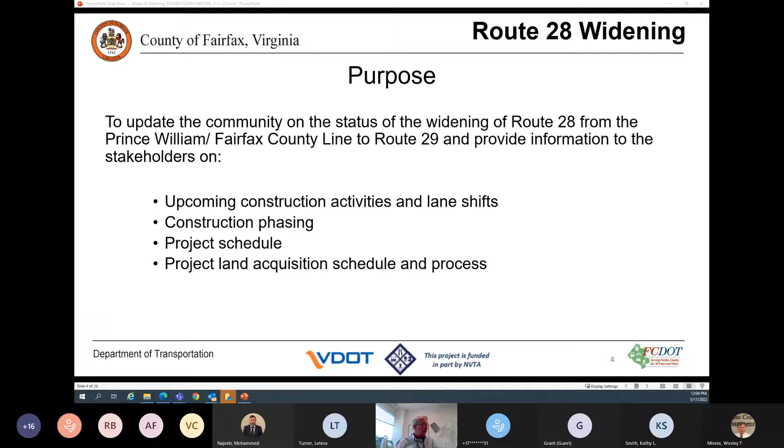Project overview, I think everyone's familiar with this. Our total project budget is almost $79 million, which includes design, right-of-way, construction, and inspection. We're building an additional through lane and a shared use path in both directions from just north of the Bull Run Bridge to the Route 29 interchange. We're also going to reconstruct the southbound 28 roadway at the substandard vertical curves just south of New Braddock and between Compton and Bradenton to meet current standards and provide greater visibility.

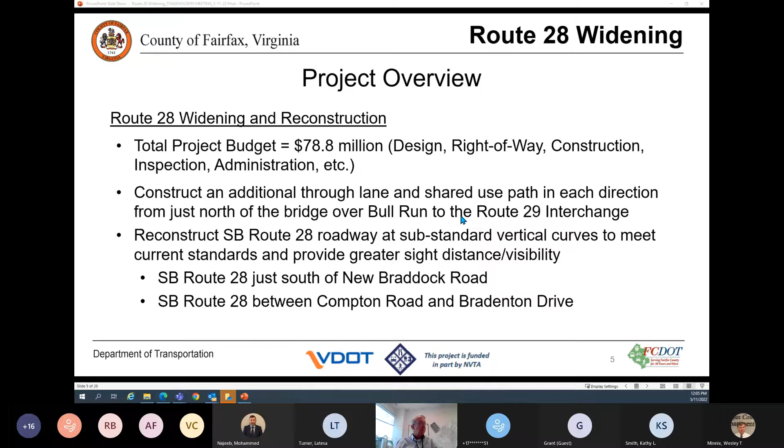Can everybody still hear me okay? Yes, yes, it looks like I'm being highlighted as talking, so that's a good sign. So yeah, just a quick overview. Once again, I'm Tripper Henson with Shirley. I know you guys can't see me. We'll do our best to work through the technical difficulties. I am the design build project manager on the project.

Some of you may have heard this before in previous discussions, but just a bit more overview of the project. Primarily, we've been working on the southern limits of the job, but there is quite a bit more work to go over the next year and a half or so of the project schedule. Basic limits are the county line up to the 29 intersection, just before the 29 intersection, as Jim alluded to.

We'll be building bike trails on both sides, northbound and southbound, as well as new signalized intersections at each of the 5 intersections along the corridor. All 5 that are signalized today will be upgraded with new signals and other pedestrian equipment associated with that.

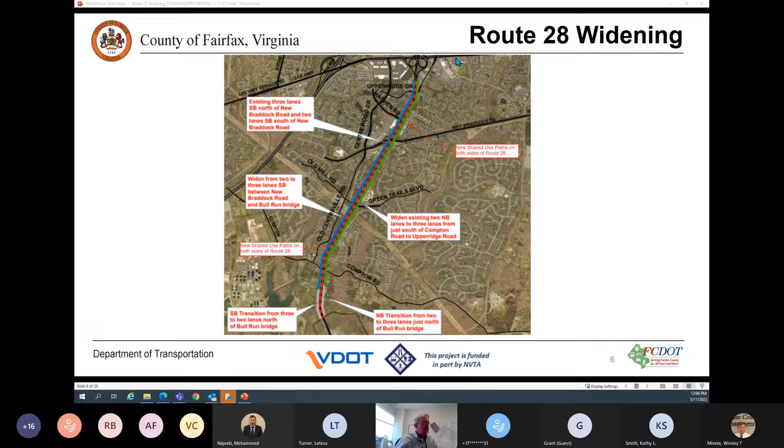The next slide has the summary of the 4 noise barriers, which are constructed as part of this project. I know we've had a couple of separate meetings that really concentrated on the discussions with these barriers, but just as a reminder, or if anyone on the call today wasn't part of those meetings, these are the 4 locations.

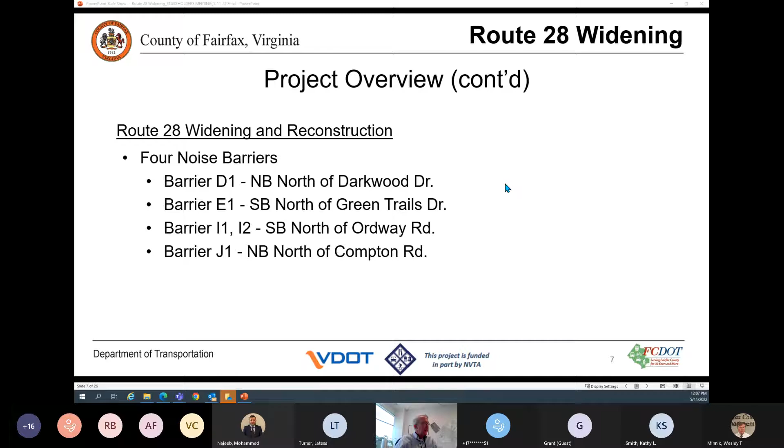We have them ordered by generic wall numbers just to be alphanumeric, but D1, north of Darkwood Drive, is the next slide—basically 28 northbound on the right side. Darkwood Drive is down there on the left of the screen, just to give everybody some orientation. That wall will be constructed.

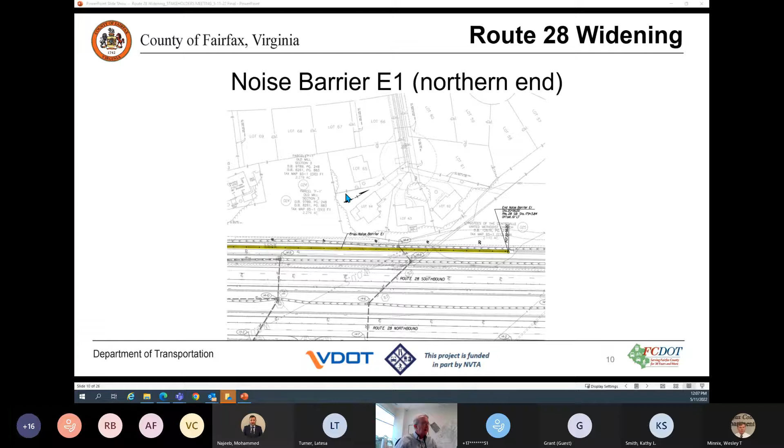The next wall, E—the schematic here is too big to fit on one slide—but southbound, just north of the Green Trails intersection, basically across the street from the Darkwood wall we just showed. That is the front side of the Old Mill community.

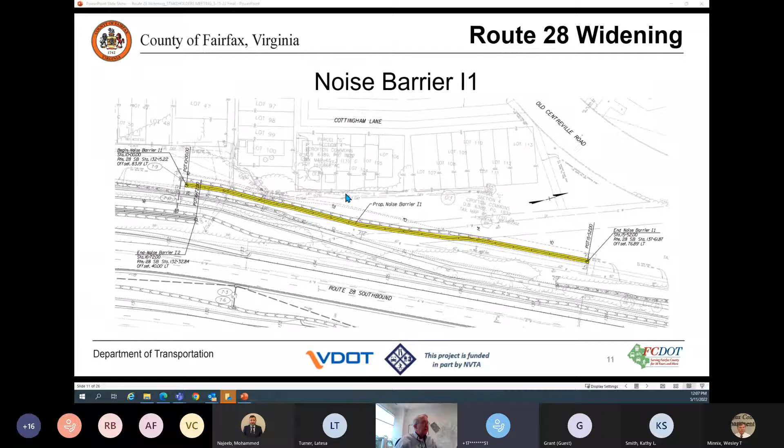The next wall, I-1, is actually a 2-piece wall. There's I-1 and I-2 down at just north of Ordway Road. This is the Crofton Commons neighborhood behind it. There's a gap in the wall that the trail will cut through, and that's why the walls are actually 2 separate structures, but really 1 noise barrier.

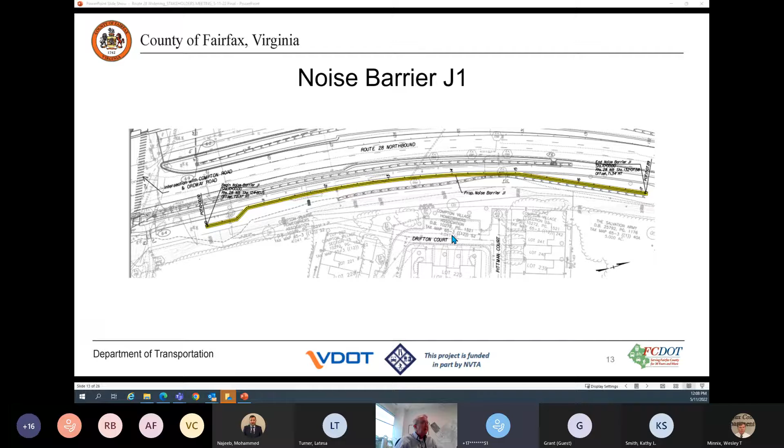And then lastly, northbound right side, just north of Compton—this is wall J1, so Compton is right on the left-hand side, right off the screen. We'll talk a little bit more about schedule here in a bit, but those elements will be constructed later in the project once design is finalized.

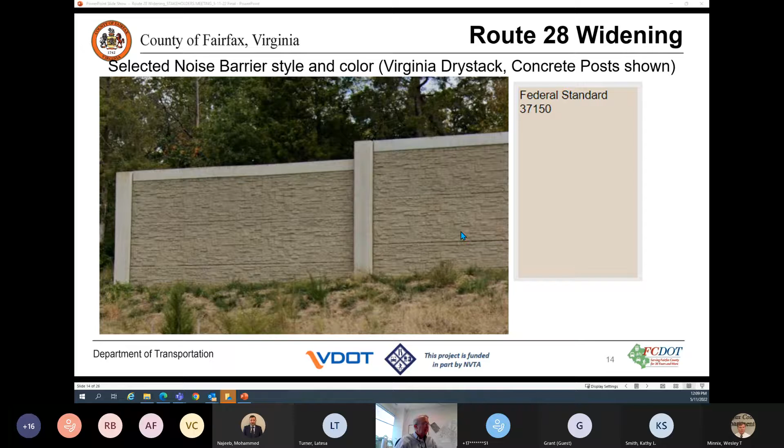So that's just a quick synopsis of what the wall will look like. Now a little bit about schedule.

This being a design-build project, we've been under contract working with the county, VDOT, and our designer Dewberry for quite a while now, working through design and moving into the construction phase. Those items in red are completed—real dates as we've gone through the process of getting design finalized.

A lot of folks probably remember we got out there early and did some advanced temporary work that completed early spring of 2021. That was to facilitate the room to shift traffic to build the permanent work we're working through now.

Roadway plans were finalized last fall, early winter, and then we rolled into right-of-way acquisitions, which have also recently been finalized. But as we're trying to get the job built, we're also managing design along the way, so we've had a lot of moving parts and continue to try to get to the finish line as quick as possible.

Permanent roadway widening is certainly underway—it's been underway for quite a while. Those folks driving through the job or familiar with it see all the work getting completed. That will continue through the project duration.

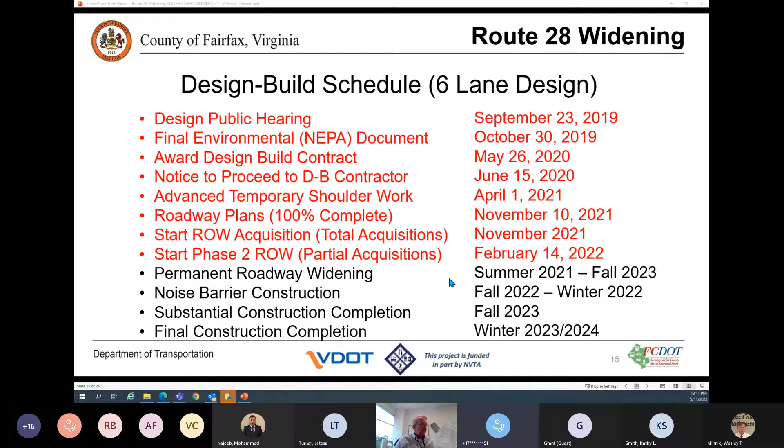Substantial completion next fall, with all the roadway elements opened up, is the current schedule, and final completion thereafter—finishing up grading, tying in some areas, and getting final pavement markings done, that sort of thing. So that's the real big picture look ahead. Now trying to dive down into a little bit of the specifics of what you'll see in the next few months.

Obviously, the primary areas of the job we've been concentrating on are the southern limits. A lot of that was based on limited right-of-way impacts as well as limited utility impacts, so we prioritized the areas available for work first.

We will continue working storm drain, storm structures, as well as the stormwater management ponds. A lot of folks have probably seen the clearing occur for the ponds. There are 3 ponds on the job that are above-ground facilities.

Excavation and paving will continue along Route 28. The bulk of the job, of course, is along 28, with side streets tying in and being improved also, but we're going to concentrate on trying to get 28 completed and opened up to help the commuting traffic. Temporary barrier placement—we've placed almost all of the first phase worth of temporary barrier from New Braddock to the south.

There is a little bit more barrier in the median, both on the northbound and southbound directions north of New Braddock. That will happen later this summer to open up some more work areas for the widening activities and storm drain to occur. Permanent traffic signal construction is well underway.

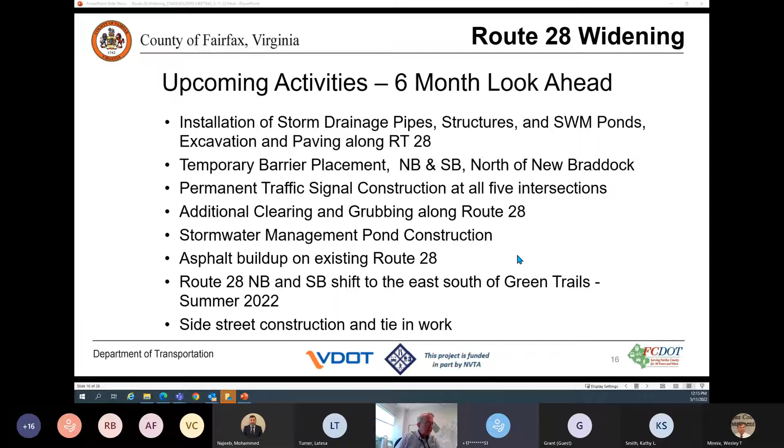We'll, of course, provide some updates on the county website and give everybody advance notice of that work upcoming. And as we finish these intersections and tie everything in, we will see some more activity on the side streets, tying in and facilitating new turn lanes and widened turn lanes and that sort of thing to more freely move traffic along 28. I know that's a lot, but just kind of an upfront look ahead of what we'll see coming up.

This is a graphic just kind of showing how traffic is being managed throughout the construction phase. Stage 1B off on the left is the current phase that we are working in. Area 1 is Old Mill to the southern limits of the project, so the Prince William County line. As I mentioned too, this is really the majority of the work that's occurred to date. Northbound lanes are on the right-hand side of the screen, so barrier set, protecting both the traveling public and the workers as the work area occurs to the right of the screen.

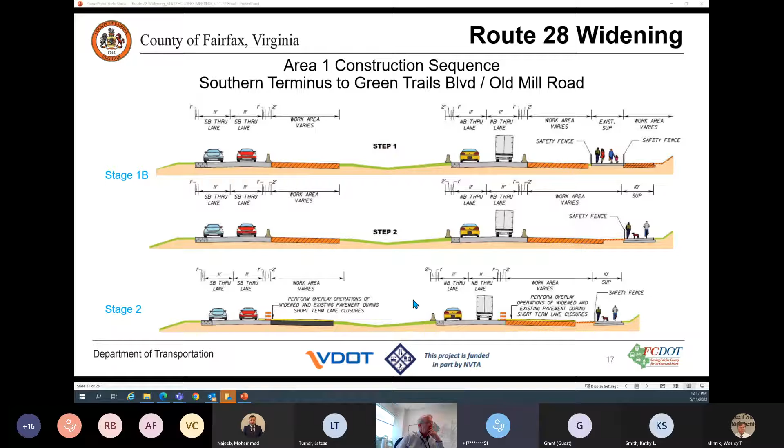Similarly on the southbound side, work is occurring in the future median widening activities for that third lane of 28 southbound. As we complete areas, the barrier will be pulled and relocated, and barrels will be placed to allow for buildup of the existing lanes under lane closures to tie in the asphalt and fix those grade issues that I mentioned. And then we'll shift traffic onto the section that is in orange and widen to the opposite direction. So just kind of a higher level view of where we're at.

Area 2, which we refer to as Green Trails, runs Old Mill to the northern limits of the job. The first phase work includes work in the median. Of course, we're concurrently building the stormwater management structures to the outside, which is a lot of the work area as well, but the roadway widening activities in the first phase are to the median. So that new barrier that will be placed north of New Braddock is to protect the northbound left and southbound left median widening on the northern limits of the job.

Similarly, we have some asphalt buildup once we finish those widening areas that will occur behind barrels, under lane closures, and off-peak hours. So once again, I know that was a lot of information, but a very high level summary of where we're at and where we're moving.

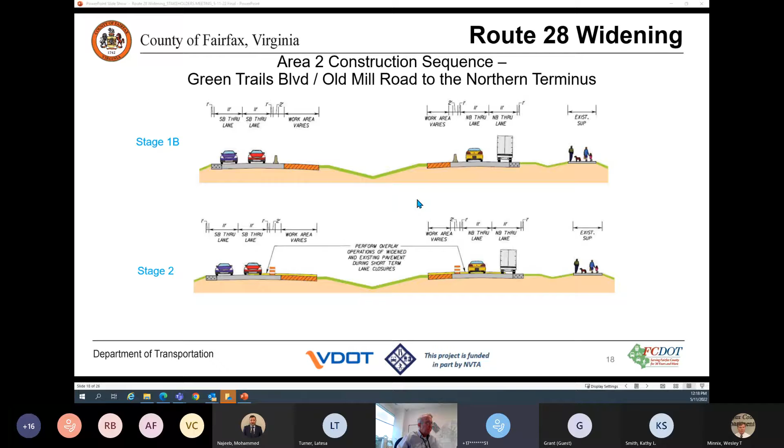Unfortunately, the work required on this job requires a significant amount of lane closures to be able to safely complete the work. We try to plan out our activities as much as possible to minimize our impact on the traveling public, but these are the contractual lane closure hours that we're obligated to on the project.

For the most part, 9:30 to 3 is the expectation along 28. It's a little bit earlier on Friday, where we get out of the road just to avoid that weekend rush, 9:30 to 2.

There is also going to be, and has already been, a significant amount of night work on the job. A lot of that is to minimize the impact on the traveling public, as well as some work that's just safer and easier to do at night with a little bit more work hours. So a noise waiver has already been acquired for the project, and that will be continually monitored, and we'll do everything we can to minimize any impacts to folks that live along the corridor.

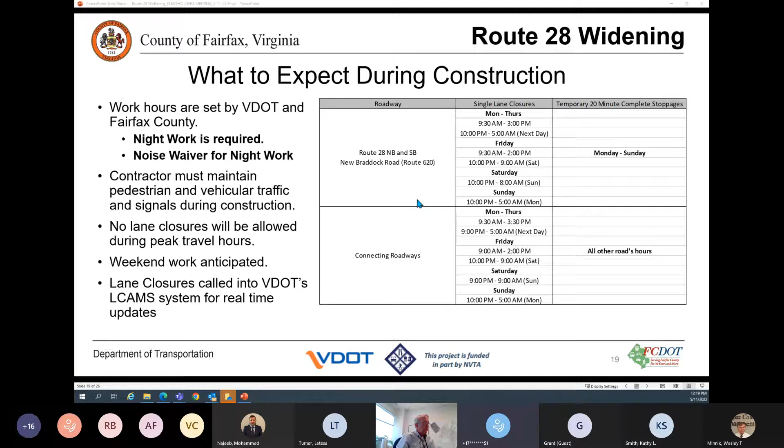Moving into the right-of-way portion of the presentation, like I mentioned, I'm design build project manager overseeing the entire project. Ryan Mara is on the line, and I think he's able to speak if we have any specific items I glance over. But Ryan is our right-of-way manager, so he's helping issue all the right-of-way acquisitions required on the project.

This is just a quick summary level of the amount of parcels affected as part of the project, 48 in total, 4 of which were the advanced package that have already been in process for a number of months to try and keep the schedule moving, to acquire those early parcels to allow for the stormwater management ponds to be constructed.

Of those 48 parcels, there are a total of 37 unique landowners affected. So basically there's a handful of parcels that are the same owners, primarily some of the HOAs along the project may have a couple separate individual parcels, but the same owner.

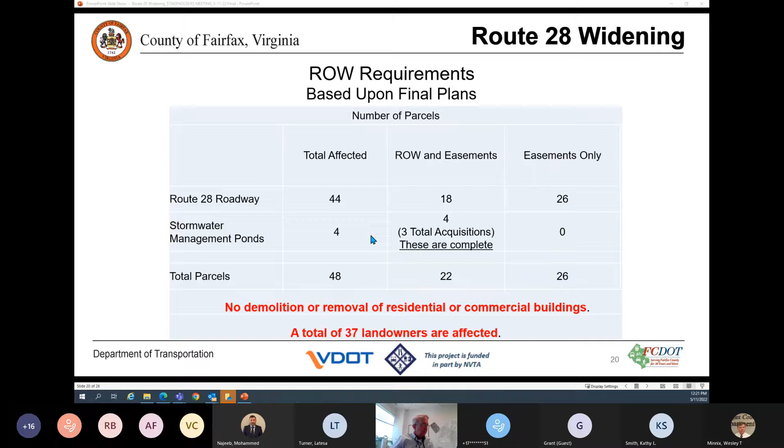So the good news: no demolition or removal of residential or commercial buildings is happening on the project. That is something we all worked towards, and we avoided relocations at all costs. So just a little bit of a summary level.

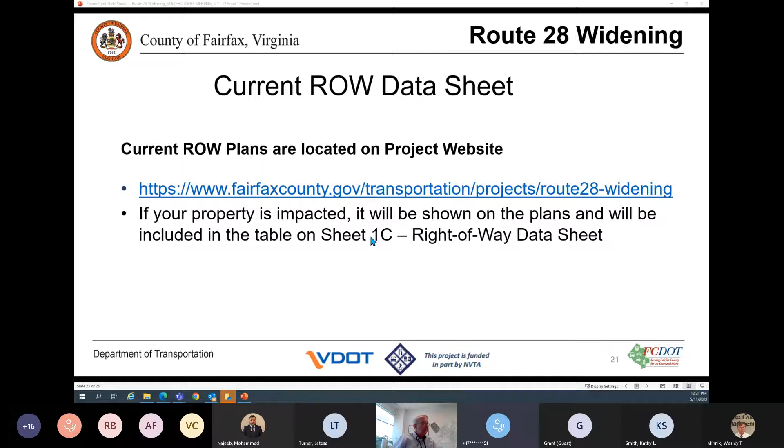There is a right-of-way data sheet on the project website. We won't go to it here, but if you have any questions about your specific property and need to see exactly why and what is being acquired on your parcel, it's shown on sheet 1C, as well as other details on the plats and sort of things that will be a part of the offer package.

So what to expect if your property is affected? A lot of this information is repetitive from previous meetings. Also, it's worth noting that certainly some property owners have already been contacted and been working with Ryan or his team. Shirley does use a subcontractor, Diversified Property Services, so sometimes it's confusing, but potentially you guys are hearing from our subcontractor, not directly from Shirley or Fairfax County.

Appraisals will be done on all properties valued at $10,000 or greater. An offer package will be presented after appraisals are complete and approved by Fairfax County. So we're continually working through those offer packages and getting concurrence from the county and VDOT as necessary prior to approaching the property owners. Of course, a copy of the appraisal is included in that offer package and will be sent over. If you have any questions once you receive it, by all means reach out to Diversified or Ryan.

Out of the 37 landowners I mentioned previously, 21 offer letters have been sent out as of today. So if you're expecting to be contacted and haven't, and been wondering why, there's probably a good reason. There have been a handful of design changes that we've worked through that have affected specific properties, so some are able to happen sooner than others.

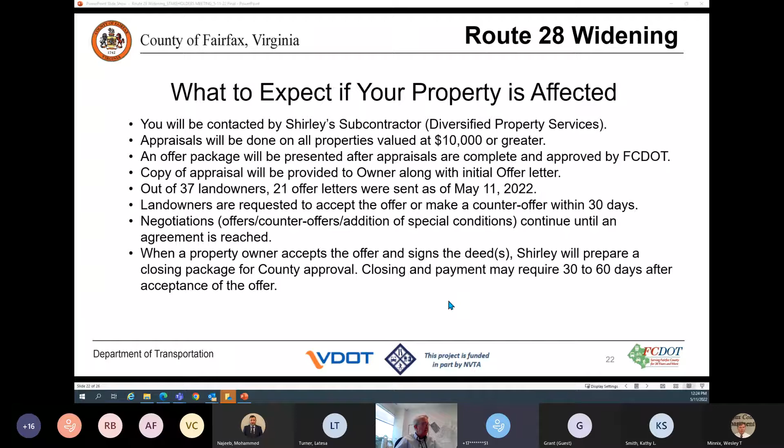Negotiations will continue until an agreement is reached. When a property accepts the offer and signs the deed, Shirley will prepare the closing package, which also goes through county approval, of course. And then the closing and payment potentially could require 30 to 60 days before it's actually finalized after the acceptance. Next slide.

Are you there, Trevor? I am. Did the slide move and my screen didn't take it? Yes, I'm still looking at the...

Continual technical difficulties. So if you guys are already reading this next slide, we're working to prioritize parcels as needed, primarily for project schedule. We are hoping to finalize all acquisitions on the project by early summer, but some are more critical than others to complete. So I just ask that everybody work with us to try and finalize everything as quickly as possible. If there's any questions or concerns, by all means, we'll do everything we can to work through any concerns that anyone might have.

No construction activities will be allowed on private property until a right of entry agreement is executed or the property is acquired. So with each offer package, there will also be a right of entry that allows, while the process is worked through with final settlement and payments, for the project to continue to work on the property. We've done this a couple times already on the project, but it's a real quick and easy way to reserve your rights while we continue to work through the particulars.

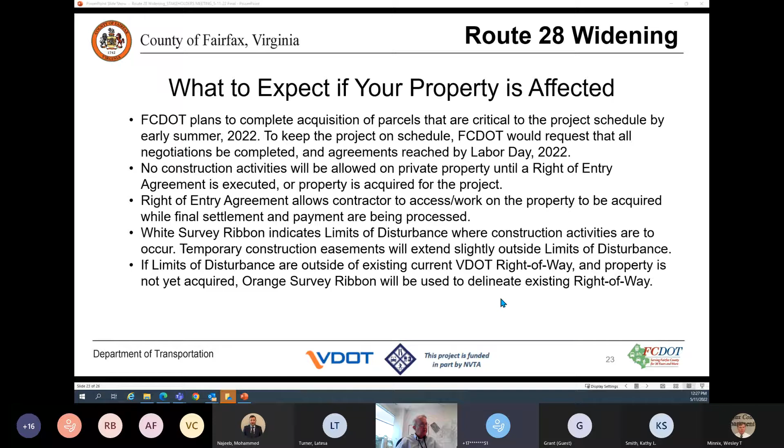If there is right of way required to be acquired as part of the project that goes outside of existing right of way, that will be shown in orange ribbon. I know that's somewhat confusing, but either white or orange is our limits that we're allowed to work to as of the moment of the survey. That makes sure that our folks are not accessing property that we don't have access to yet. And once the right of way is acquired, whether through right of entry or actually agreement and settlement is acquired, those orange areas will be restaked out with the ultimate limits of disturbance in white. So if you see white ribbon out there, that's the limits that we'll be working towards, and likely either existing right of way or the right of way that's been acquired on the project.

So that's all I've got. Like I said, I know it was a lot of information. I believe Jim probably already mentioned this while I was trying to sign on, but the presentation will be uploaded to the project website. If you have any questions, by all means, feel free to reach out to either Jim or myself, and we'll work to get everything answered.